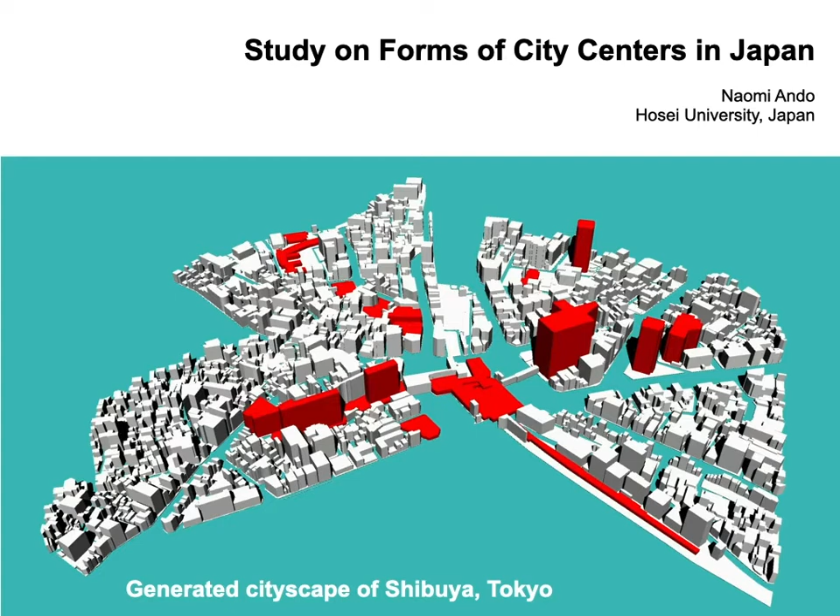I would like to talk about studying on forms of city centers in Japan. It is an analysis of cityscapes and a method to generate cityscapes by using algorithmic calculation of computer graphics. This is a view of Tokyo. Tokyo is the capital of Japan. It conforms to a population area of over 30 million with surrounding cities.

In the world, there are various cityscapes, which are configured by three-dimensional volumes of buildings. For example, this is a view of Chicago, Dubai, United Arab Emirates. I think each city center has a unique image of its cityscape. In Georgetown, in Penang Island, Malaysia, we can see a cityscape formed by arrangements of low-rise shop houses.

In Europe, for example, Brasov in Romania, aesthetic streetscapes are formed by buildings that face streets and plazas. This is a view of Paris, France. Most of the buildings, except the Eiffel Tower, heights are unified and the buildings are lined up along the street.

This is Shibuya, one of multiple city centers in Tokyo. Comparing with Paris, this streetscape is apparently disorder. In Japan, most of buildings are detached from the adjacent buildings, and heights are not unified. In spite of that, this area is highly condensed. Small buildings are sandwiched by middle or large buildings.

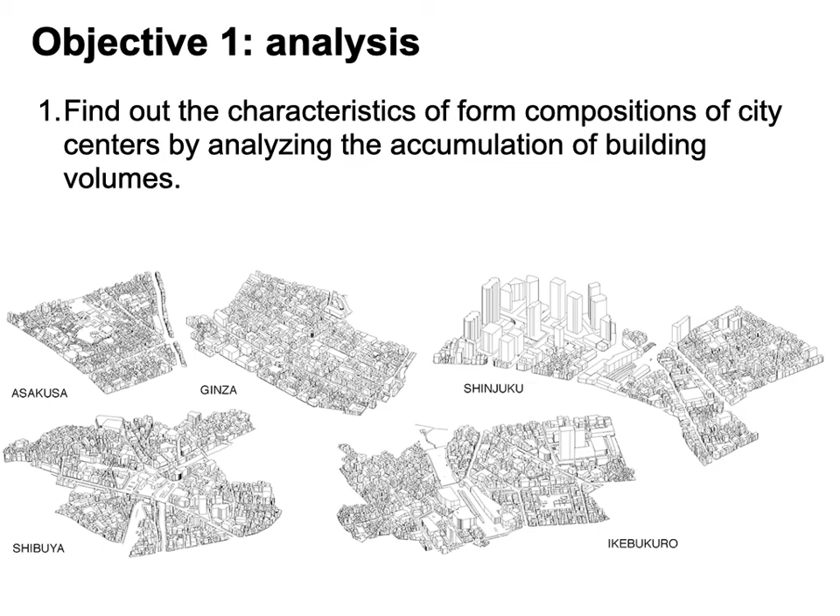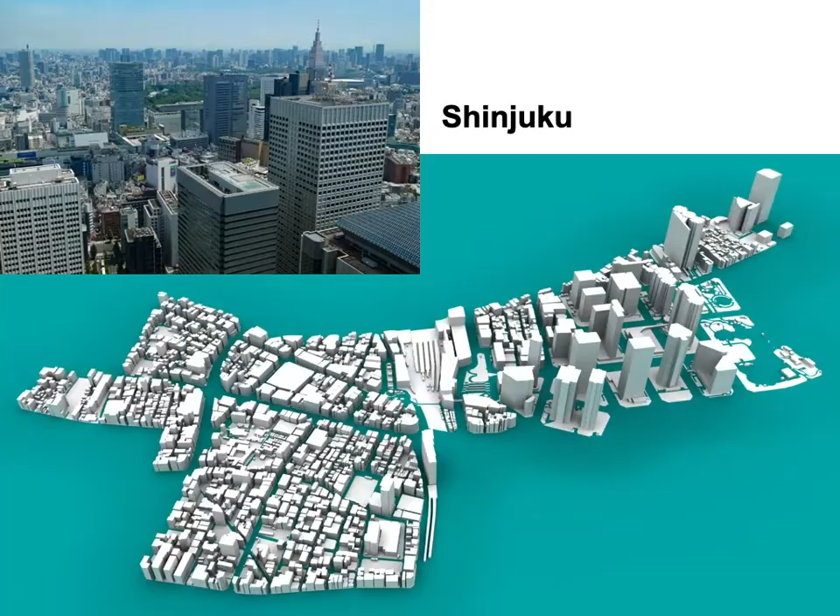Over these 20 years, I have surveyed the configuration of 5 city centers in Tokyo, Japan, such as Asakusa, Ginza, Shibuya, Shinjuku, and Ikebukuro. These are typical city centers where buildings accumulate at high density.

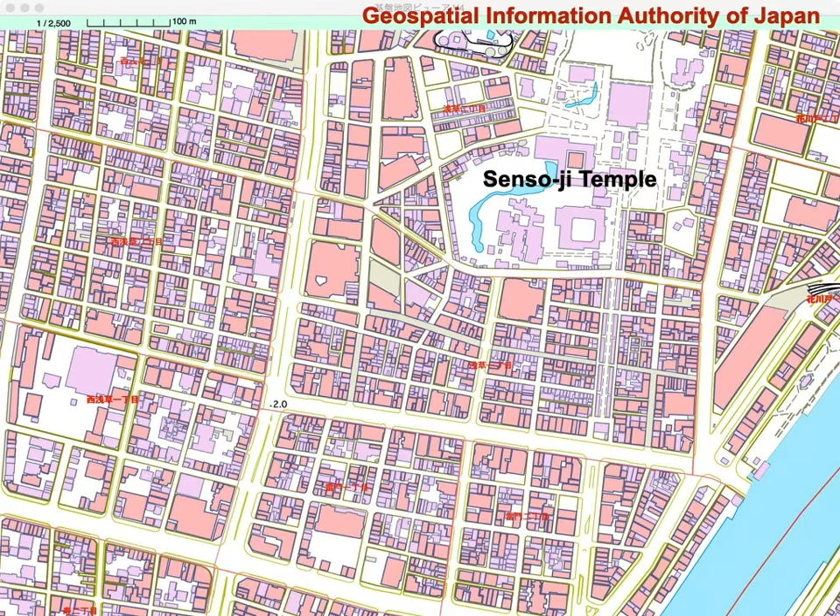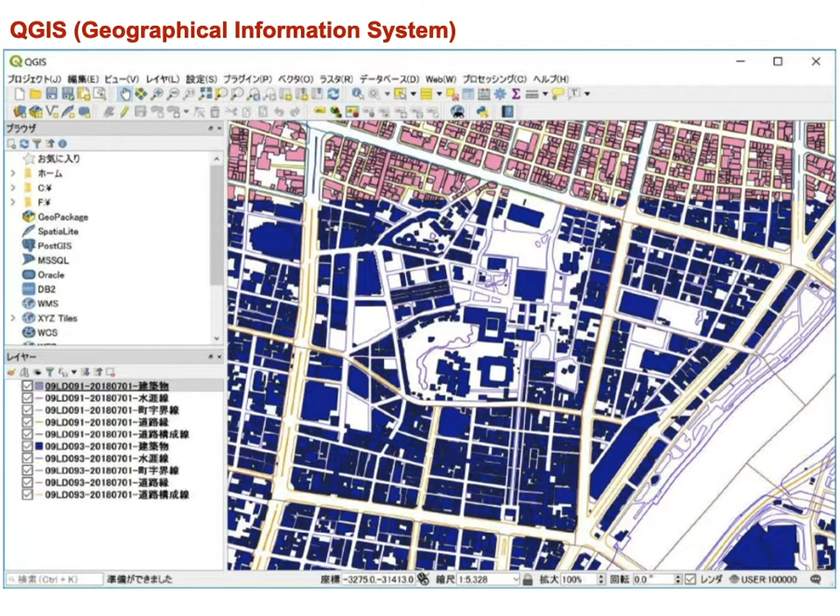Before starting the analysis, I would like to explain how these 3D models are created. In Japan, plane forms of landforms, roads, waters, buildings, and so on are digitized in the numerical maps issued by the government. This is an example of the map data. The map data contains the planar forms of buildings. I use QGIS, a geographical information system application, to convert the map data to geometrical CAD data.

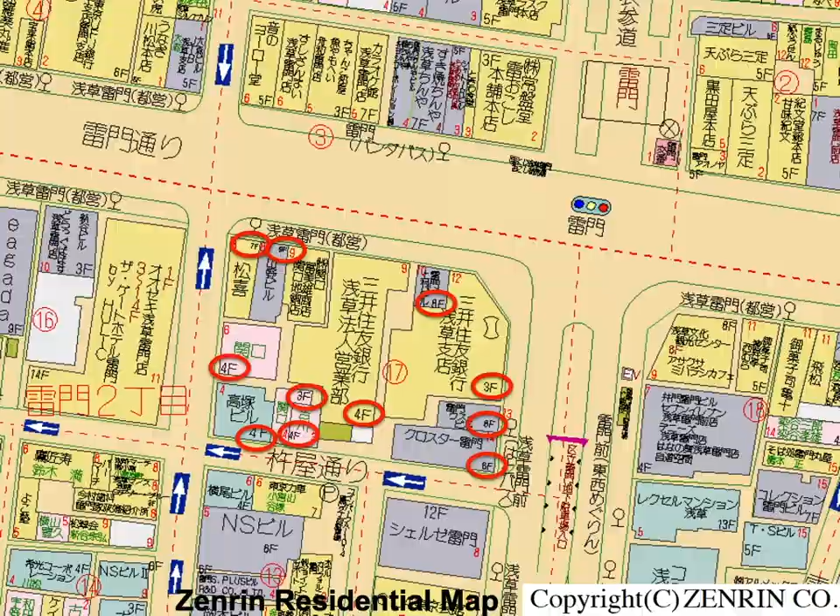There is one thing I have to point out, that the building heights are not digitized on the government maps. So, I needed to use a commercially available map to get to know the building heights. I used Zenrin residential map, in which the number of floors that explains the building heights is described. In cooperation with my students, we gave the building heights one by one, 3.5 meters for each floor, for the plane shapes while referring to the residential maps.

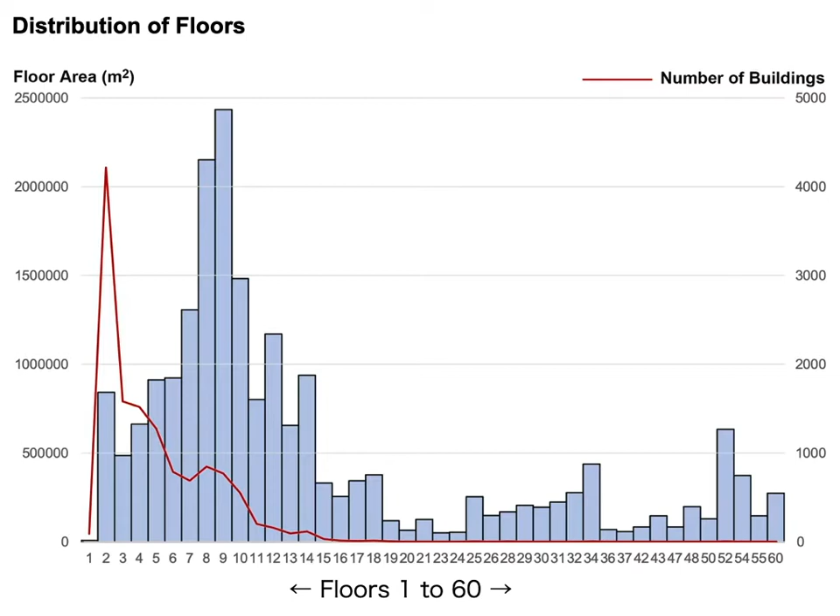Now, I would like to talk about the form composition of the city centers. By using a CAD application, we can calculate the floor numbers and the areas of the building volumes from the 5 3D models. There are 12,977 buildings with 1 to 60 floors. The graph shows the distribution of the number and the floor areas of the buildings, respectively by their floor number.

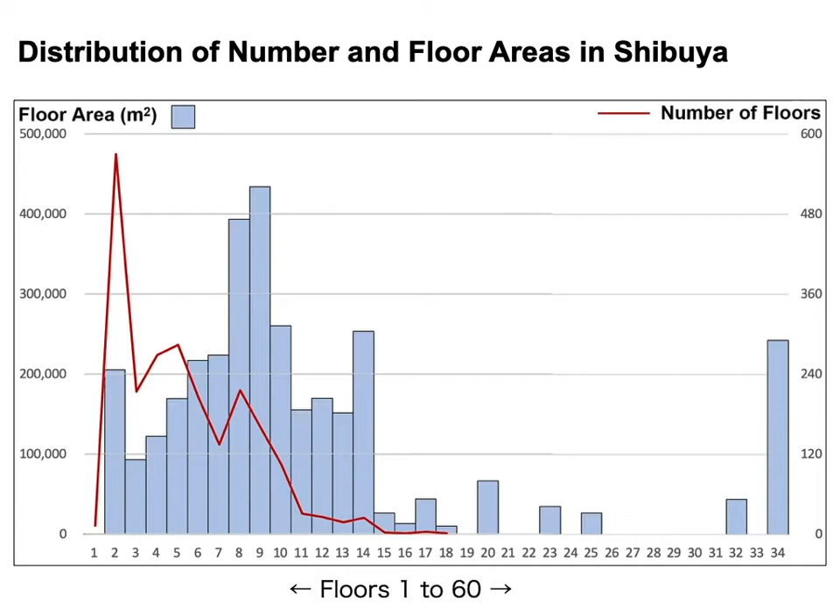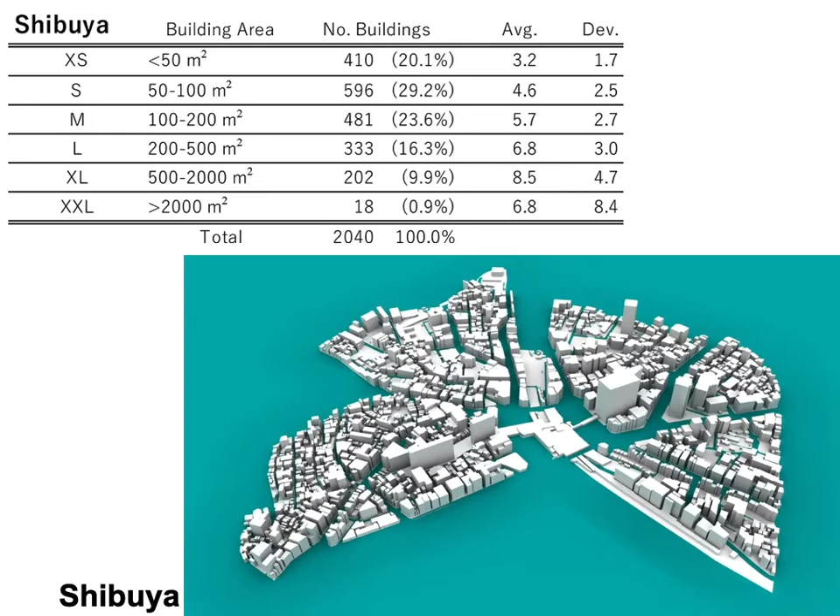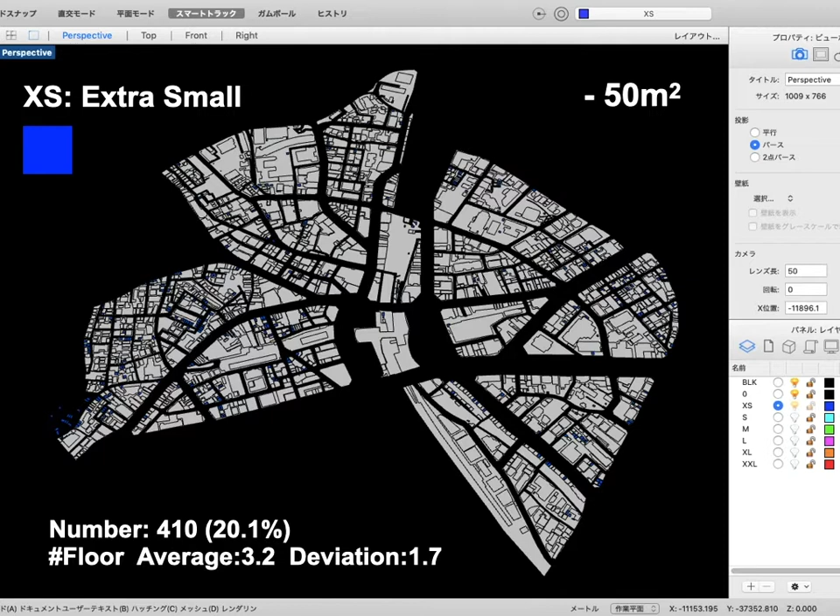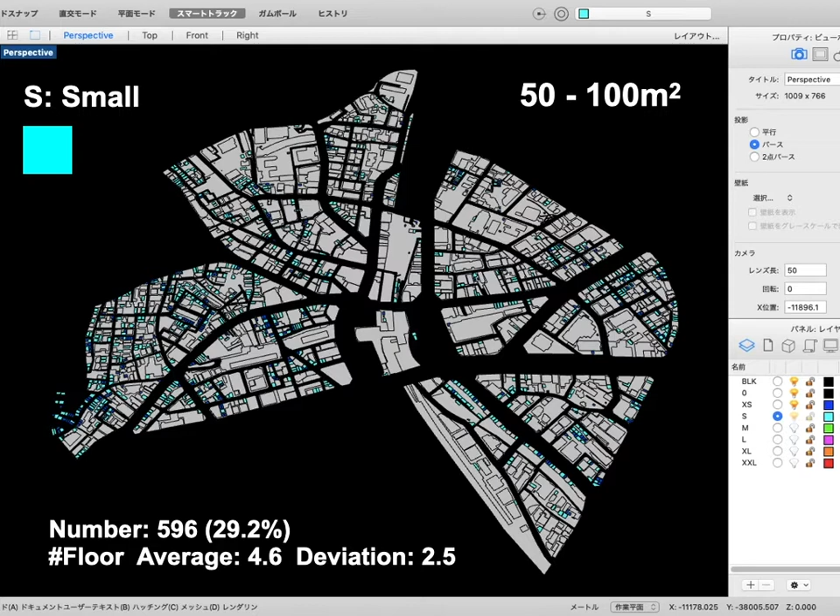When the 2,040 buildings are classified into 6 categories according to their building area, there are 410 extra small buildings, of which building areas are less than 50 square meters. The number is 20% of the total buildings. Their average floor number is 3.2 stories, and their deviation is 1.7 stories. The percentage of the small buildings, which building areas are between 50 to 100 square meters, is 29%. The average floor number is 4.6. The deviation is 2.5.

24% is the middle-sized buildings, which building areas are between 100 to 200 square meters. The average floor number is 5.7. The deviation is 2.7. 16% is the large-sized buildings, which building areas are between 200 to 500 square meters. The average floor number is 6.8. The deviation is 3.0.

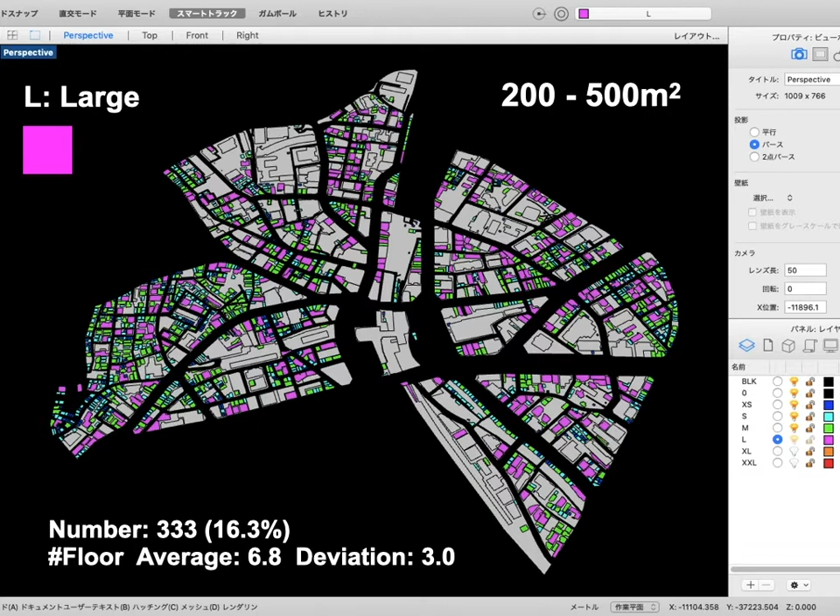10% is the extra-large buildings, whose building areas are between 500 to 2,000 square meters. The average floor number is 8.5. The deviation is 4.7. There are 18 buildings which have very, very large building areas over 2,000 square meters, such as railway stations and large-scale complex buildings. Its percentage is 0.9%. Each city center has its unique form, and its characteristics are considered to be represented by the accumulation of building volumes.

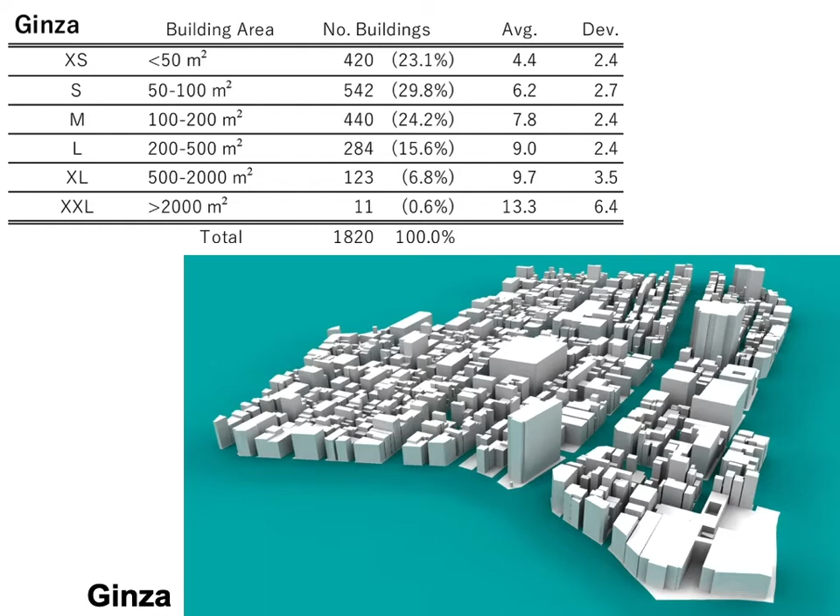In Ikebukuro, like Shibuya, several skyscrapers stand out among wide ranges of middle-rise buildings, and there are partial areas where low-rise buildings are gathered. Although there are a number of small buildings in Ginza, the building coverage rate and the floor area rate are relatively high. In Asakusa, low-rise and middle-rise buildings are condensed. In Shinjuku, the contrast between the skyscraper areas on the west side and the middle-rise buildings on the east side

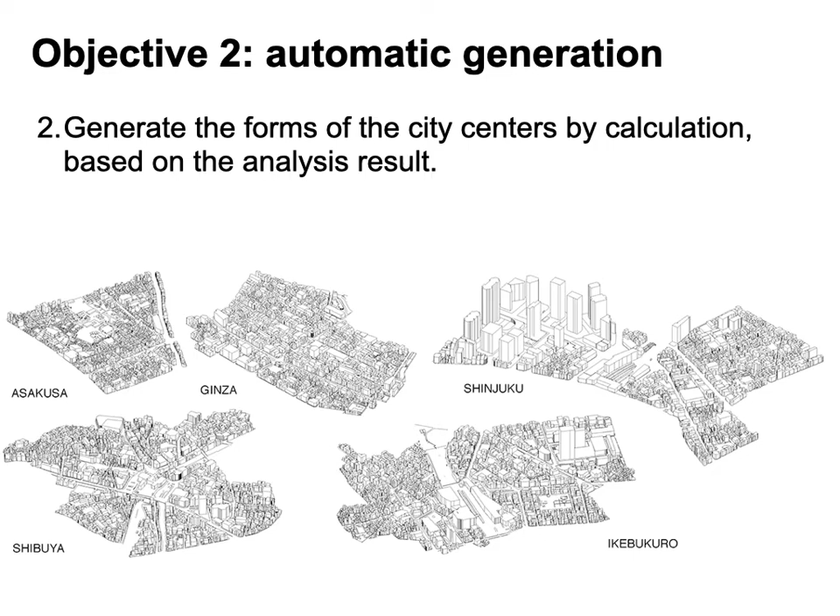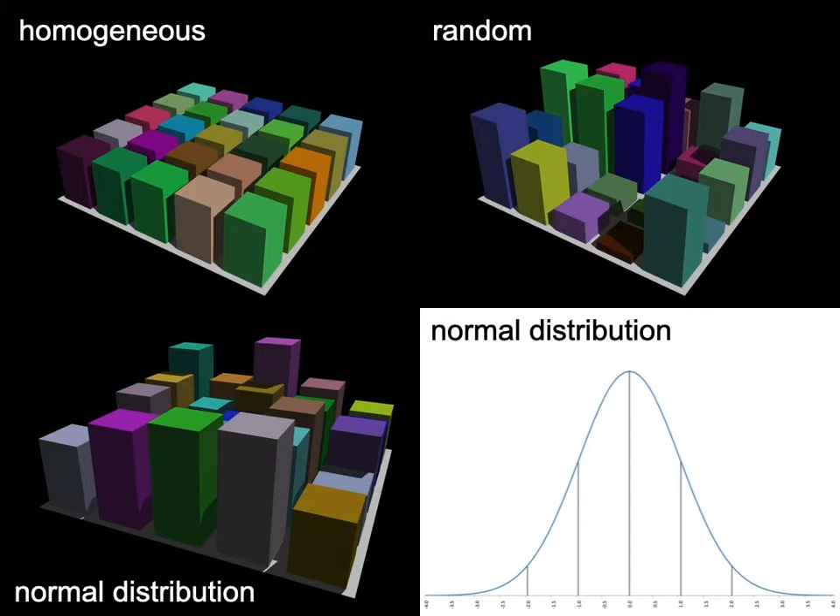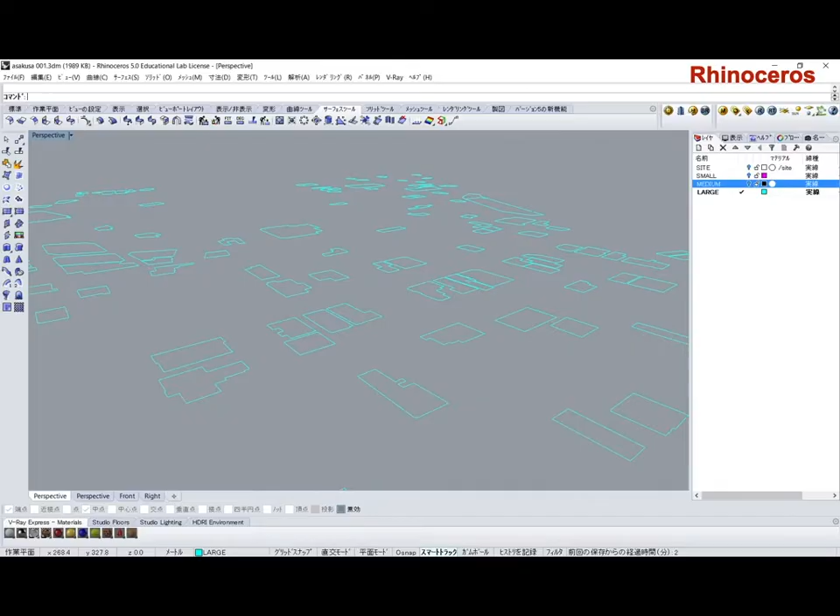I took a hypothesis that the building heights distribution follows a normal distribution, not a homogeneous distribution or a uniform random distribution. I categorized 2,068 total buildings into 3 groups based on building areas: less than 50 square meters as small, 50 to 200 square meters as middle, and over 200 square meters as large. For the large-sized buildings with over 200 square meter area, the average floor number was 7.0. With the amendment, I considered the average height of this group is 31.5 meters, and the deviation is 14 meters. The screen showed the shapes of the large buildings.

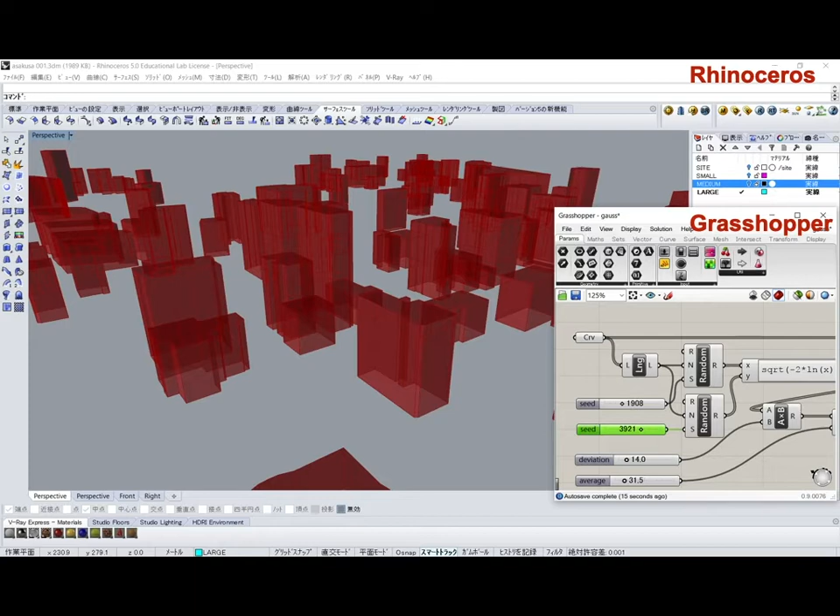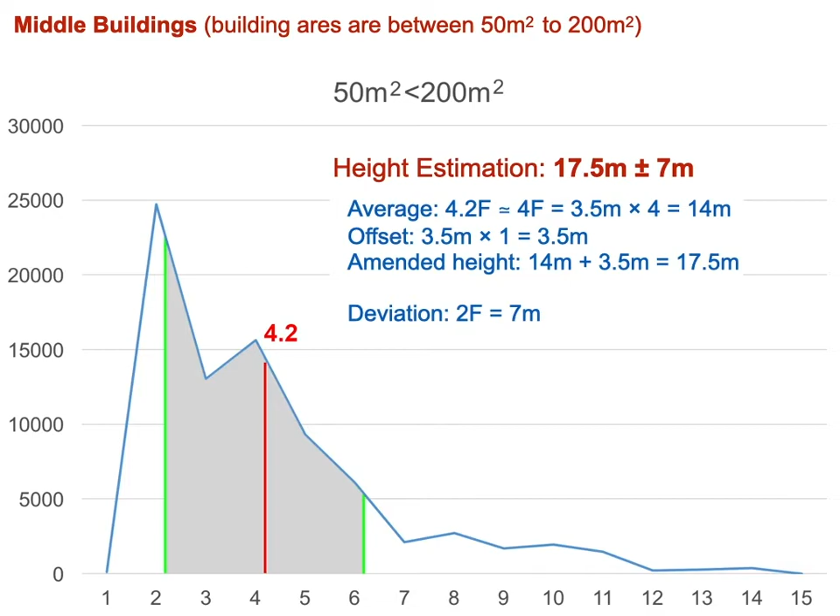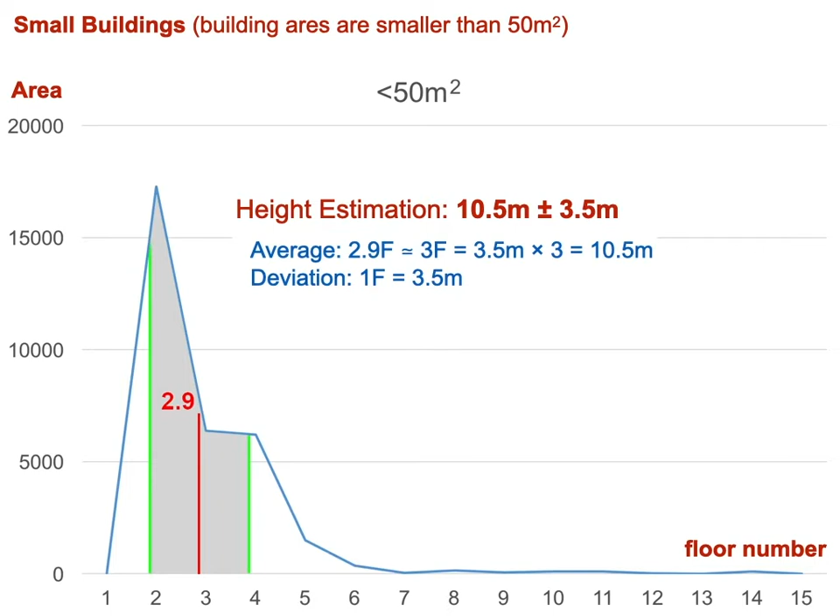Then, the building heights are given according to the normal probability distribution of the means and deviations of each group. This is a script which generates heights with a normal distribution. The heights with the average of 31.5 meters and the deviation of 14 meters are generated. So, this is a result of generating heights of the large buildings. The same method is applied to the middle buildings with the average height of 17.5 meters and the deviation of 7 meters. The gray volumes are the generated middle-sized buildings. I use the average height of 10.5 meters and the deviation of 3.5 meters for the small buildings. The pink volumes are the small-sized buildings. Again, this is the result of the automatic generation of the Asakusa city center.

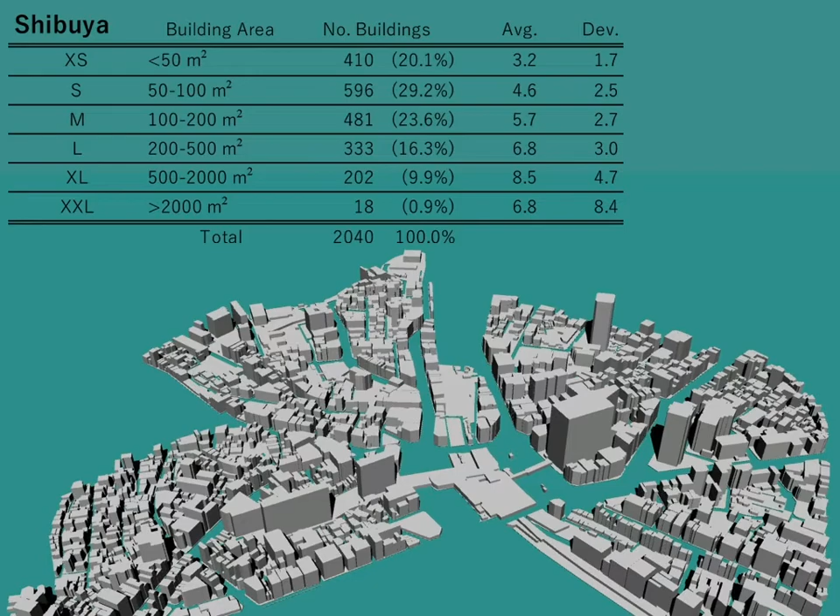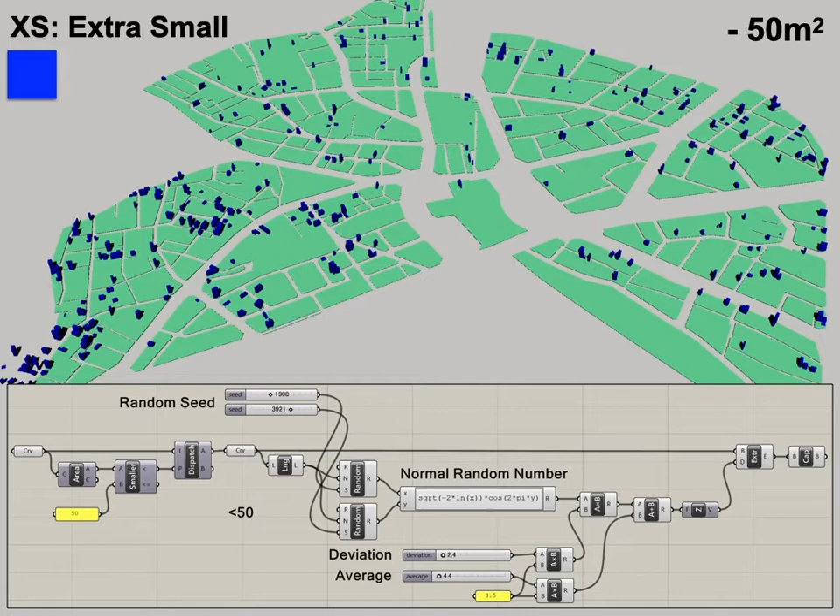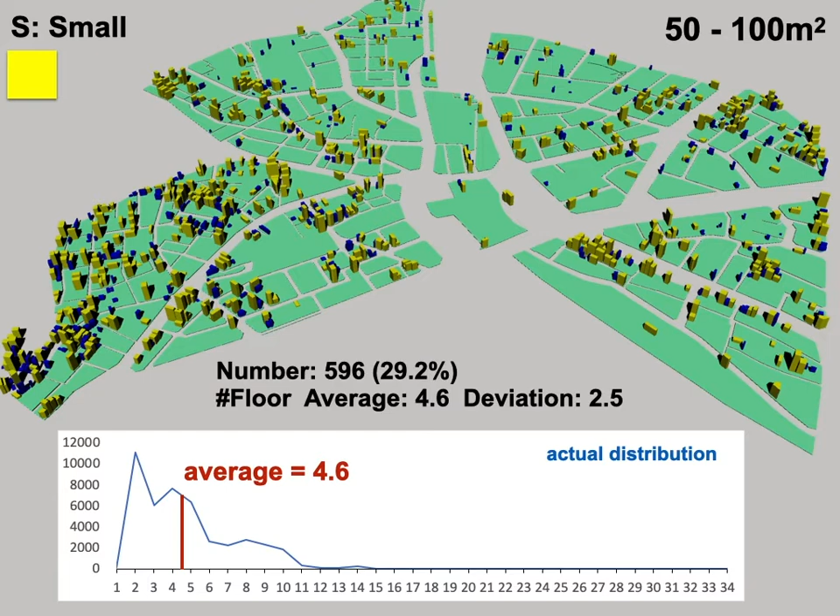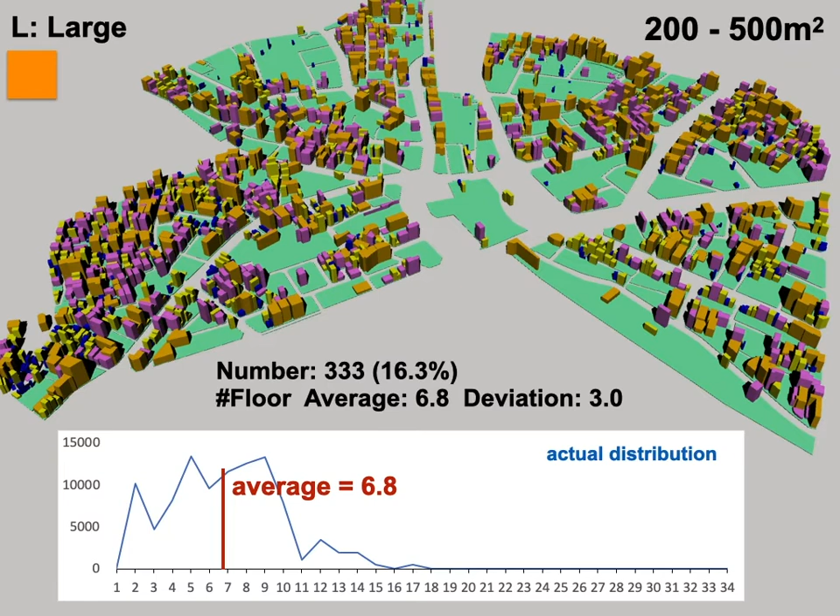After trial and error to apply this method to other city centers, I noticed that it is effective to classify the buildings into 6 groups: extra small, small, middle, large, extra large, and super large, according to their building area. For example, in Shibuya, at first, I extracted the extra small buildings, whose areas are less than 50 square meters. Then the heights are given according to the normal distribution with their average and deviation. Small-sized buildings with 50 to 100 square meter building areas. Middle-sized buildings with 100 to 200 square meter building areas. Large-sized buildings with 200 to 500 square meters. Extra large-sized buildings with 500 to 2,000 square meter building area.

There are 18 super large buildings, whose building areas exceed 2,000 square meters, such as railway stations and department store complexes or some large-scale complexes in Shibuya. And there are also high-rise buildings with over 20 floors. I noticed that they should be regarded as peculiar elements, and the automatic calculation should not be applied. For 99% of the whole buildings, except the super large and the high-rise buildings, as 1%, their heights are generated by algorithm. This is the actual cityscape. I think these are the same. Can you tell the difference?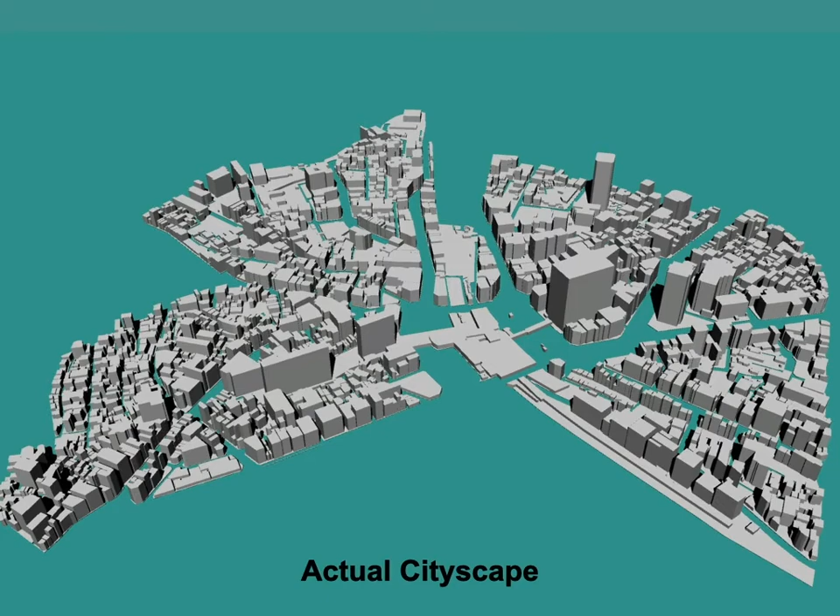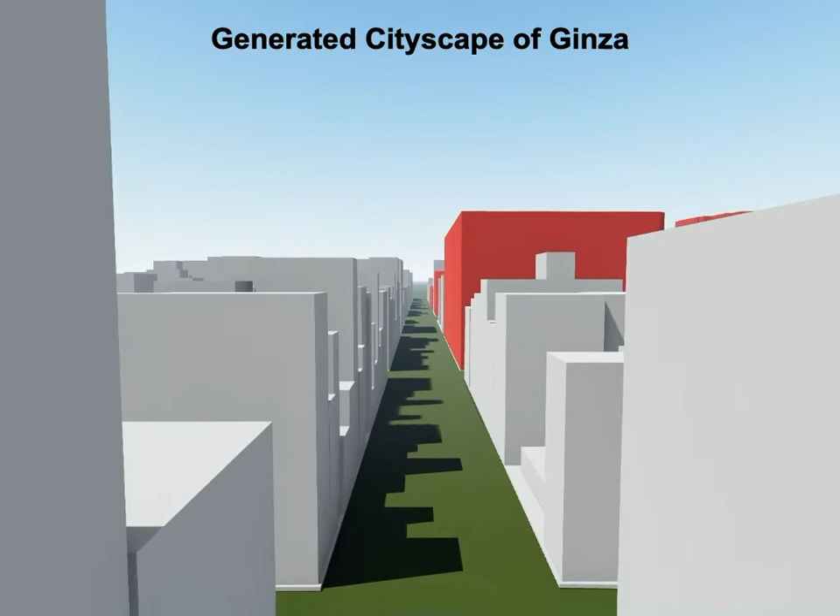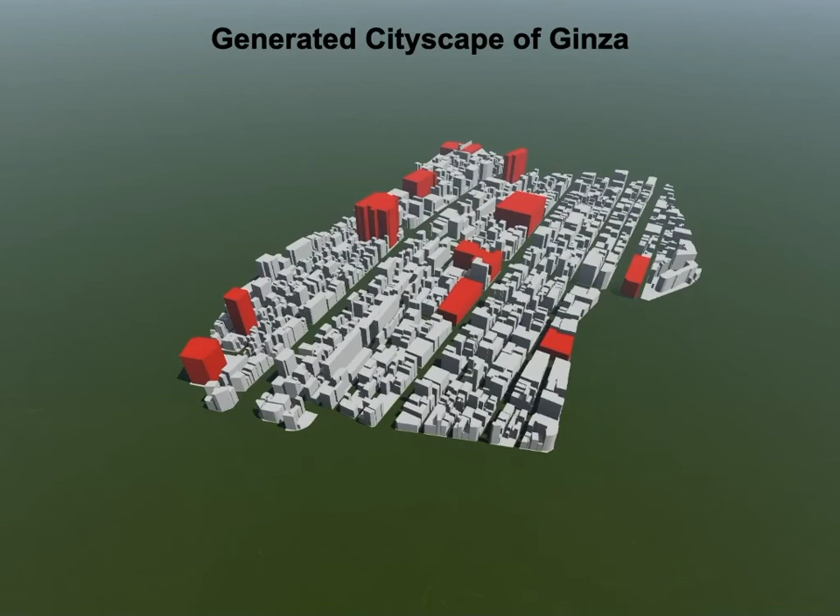This is a short animation of viewing the generated model. In this animation, the super large buildings and skyscrapers and landmarks are colored in red, as they were excluded from the automatic generation. Of course, in detail, this is different from the actual model, but I think the image of the cityscape could be represented. This is the generated model of Ginza. In conclusion, the form of the city centers could be represented by using normal distribution based on the height average and deviations. I consider that the distribution of heights is unique with respect to each city center, and it should be the characteristic of the cityscapes. Thank you for your attention.